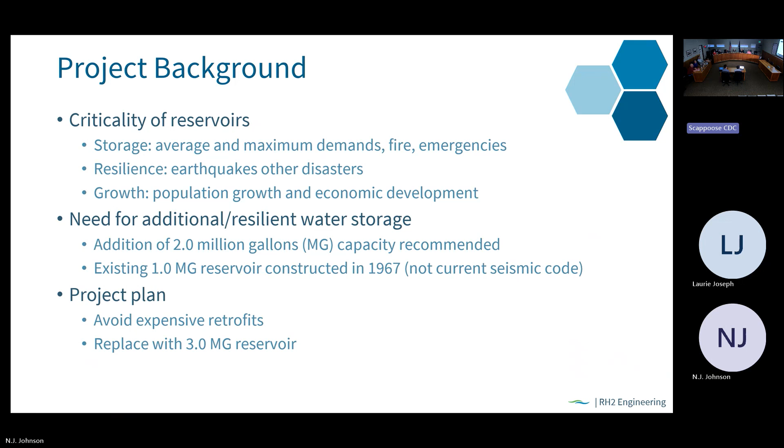This is the vicinity map for the project. There are 3 reservoirs on site: the one to the north is 2 million gallons, and the southern two reservoirs are the 1 million gallon and the 0.2 million gallon.

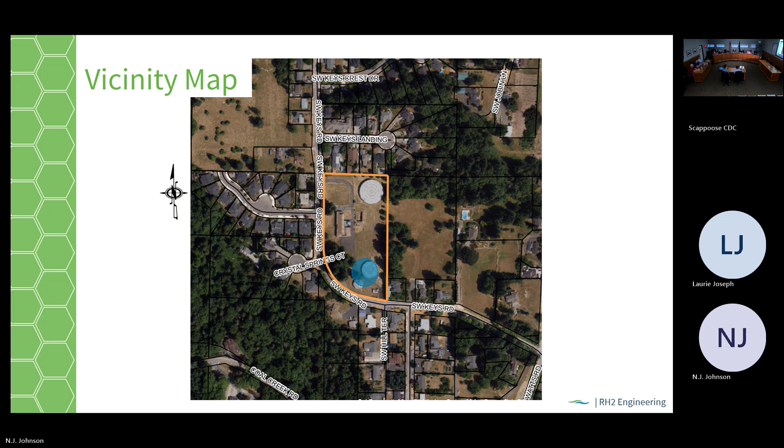This is another zoomed-out vicinity map that encompasses Highway 30 and the site. As discussed previously, access to the site for construction is through Watts Road and Keys Road.

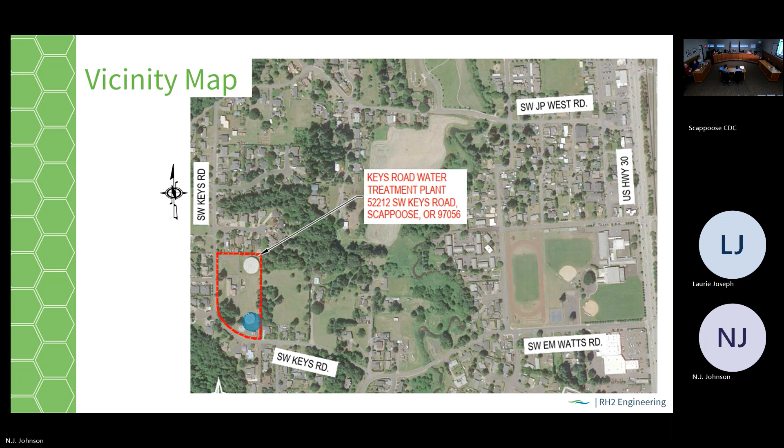I'm Taylor Stockton from RH2 Engineering. I'll continue to take you through an overview of some of the steps in the construction of this site. In this slide, we're showing the same view of the existing site, but rotated 90 degrees, with north now to the right. So you've got those 3 existing reservoirs again on the site.

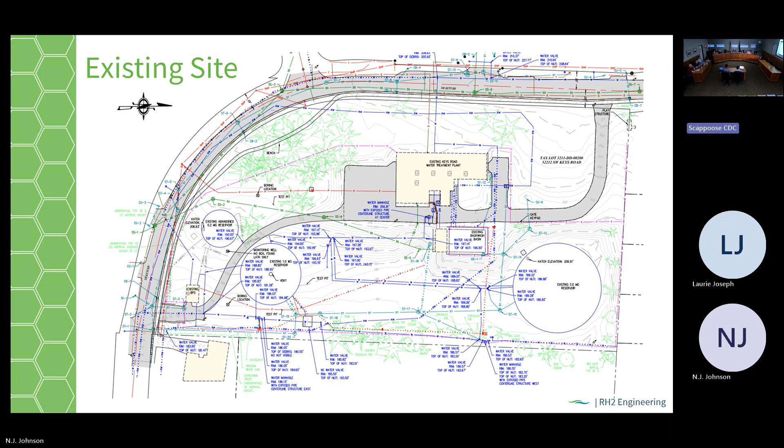In this next slide, we're showing the first phase of work, after securing some basic things on site like erosion control and temporary fencing between the construction area and the rest of the site. Demolition will occur of the existing reservoirs on the south end of the site, along with replacement of utilities like the water pipe along the east side, to get it out of the way and upgrade it to a larger, more resilient pipe.

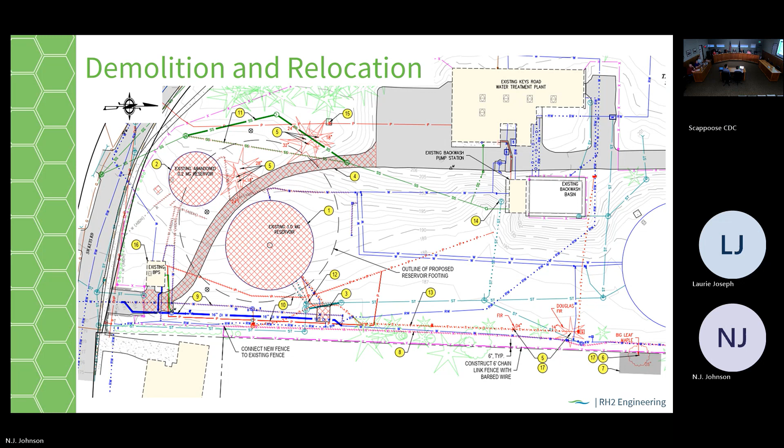In the next slide, you see the location of the new 3 million gallon reservoir with the access road going around it, and the replaced water pipe along the east. There's some additional new piping connecting between the reservoir and over to the water plant, replacing some of the older piping on site and providing additional resilience and operational control for the site.

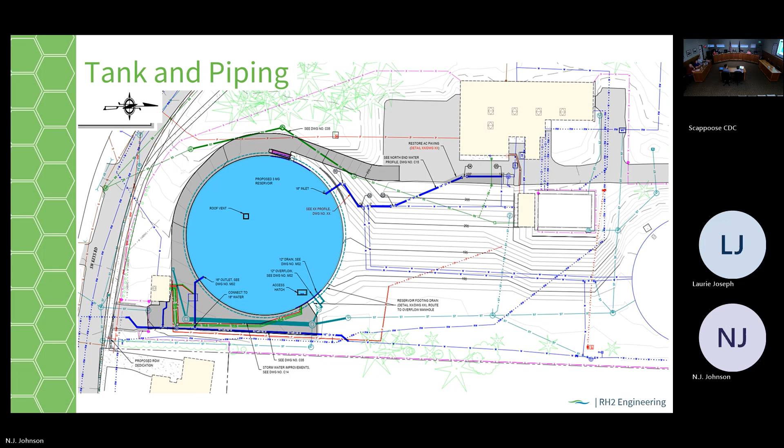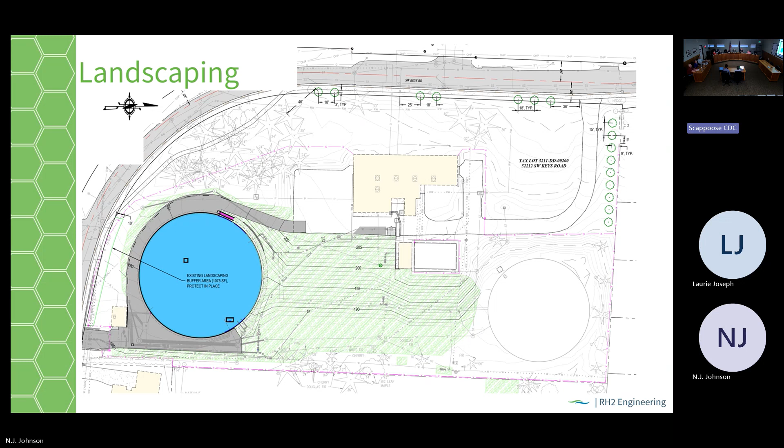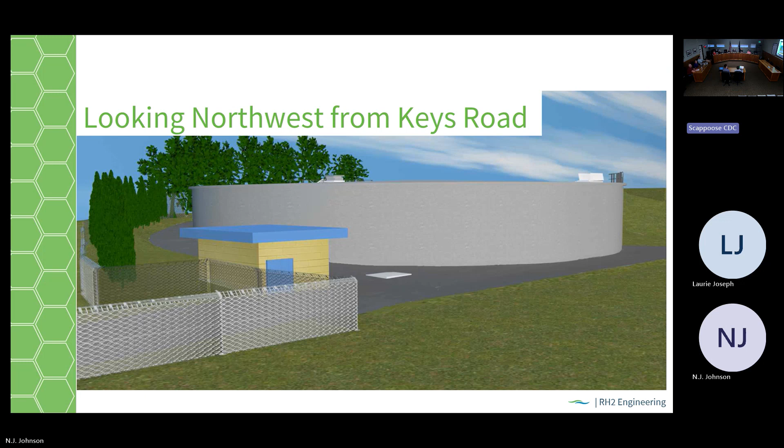This is just a rendering. If you were to stand in Keys Road, looking up the hill to the west or northwest, if there were not existing trees in the way, this is what the reservoir would potentially look like. You can see the existing pump station in yellow, the existing fencing there, along which the existing arborvitae trees run.

So there was a question earlier about funding for the site. The city has secured several sources of funding. You have the American Rescue Plan Act, which provides the principal amount of the funding, the Special Public Works Fund administered through Business Oregon, urban renewal, as well as the capital improvements budget that the city has been allocating for this.

There was some discussion about schedule earlier. Here's an overview, really from halves of years, so each bullet represents a half. You see the second half, as mentioned earlier, construction would start this summer with utility relocation, demolition, and excavation. The foundation improvements would happen during the winter, and reservoir construction would largely occur during the first half of next year. Then the reservoirs would be tested, brought into operation, and other site work and mechanical work would get finished up during the second half of next year. Landscaping may also happen during that time, but it may extend into the next year. Site is cleaned up and back to full use.

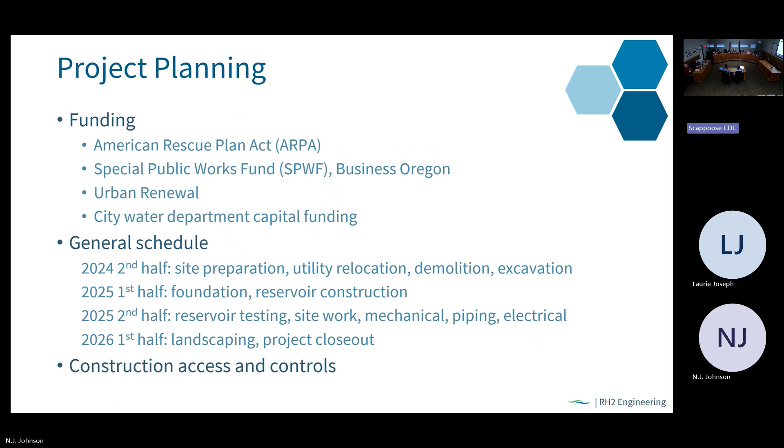From a construction standpoint, this bullet was here to discuss that main access from the south, and the limitations that construction is being contained to the fenced areas of the site. We just had this slide here again if anyone had questions about construction. That's the bulk of our presentation, besides seismic design, etc.

Thank you for bringing up the seismic design. So the reservoir is built to current AWWA and building code standards, which do take into account the site class for this site, and the foundation improvements are intended to provide global stability for the new reservoir, global stability when other things are shaking, if you will. I would add this concrete reservoir is truly designed for seismic resiliency because of the way the structures move. The floor and wall can move separately, even though they're made out of concrete. So it is built for structural resilience.

In the Shannon and Wilson document that was part of this packet, there were two options for piers: the GeoPier and the Auger Cast. So has there been a determination of which system is going to be used? We're leaning towards the GeoPiers at the moment.

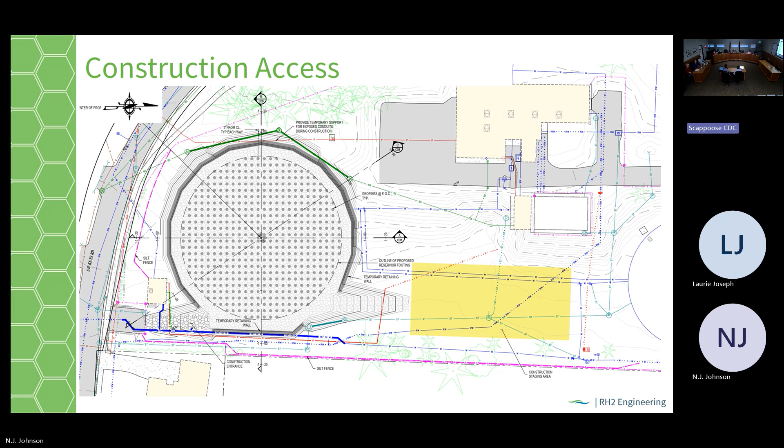Other questions? Thank you very much. Is there anybody here that wants to speak for this project? Seeing none. Is there anybody here who wishes to speak in opposition to this project? Again, none. I'm going to guess that there's no rebuttal from the applicant. Okay. And no staff response. All right, so we're going to close the hearing for consideration by the commission.

I have a question, and I'm not sure if it fits in with this or not. I think staff might be able to answer. In the news the last few days, I've been hearing about this fluoride situation. Apparently there seems to be some discussion about different cities in the country that are not going to be doing fluoride anymore. Are you guys addressing that issue or thinking about it? I'm just curious if that's going to impact anything that we're doing. Yeah, that would be the first I've heard of that.

Would you introduce yourself, please? Oh yeah, I'm Dave Sukau, the Public Works Director. There's been no discussion to this date. That's the first I've heard of that. This is Channel 2, I think. I heard it the last couple of days, they've been talking about it.